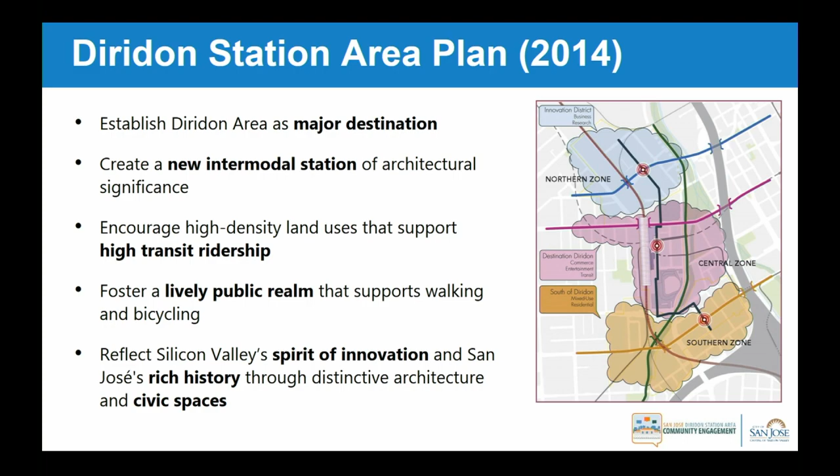We have the opportunity to really create a new neighborhood district. It's going to be a major destination area, a place that has a new intermodal station, building upon the existing transit services already provided there, in addition to the exciting new transit services that will be coming.

With that comes the opportunity for significant development — high-density land uses, a mix of uses, and a place for many people to live, work, and enjoy the area.

Along those lines, we know how important public spaces and the public realm are, making sure we have opportunities for placemaking and respites for people to enjoy — both passive and more active types of activities.

Lastly, this new neighborhood district really is an opportunity to reflect who we are here in San Jose — the rich culture that we have — and to include that spirit of innovation throughout the process.

So what does the Diridon Station Area Plan cover? It covers a lot, actually. I'll go through these elements quickly, but there's a big focus on land uses and where they're located.

There's a focus on urban design, and those public spaces — the gathering spaces — that are going to be so critical for the people living and working in the area, the station concept and how that's laid out, and obviously transportation and connectivity, and how the area is going to work.

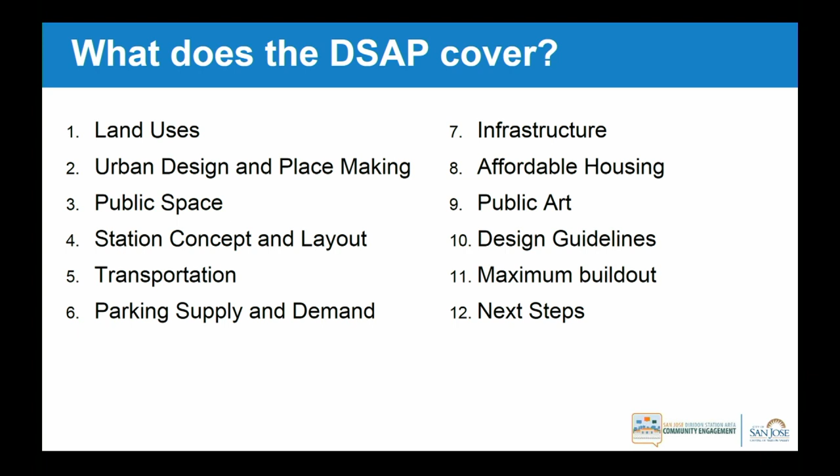Within the existing neighborhoods surrounding the area, we know that parking supply and demand is going to be a big item, along with other infrastructure needs. Affordable housing, we know, is very important.

Part of the placemaking includes public art and other opportunities for placemaking, ensuring that we have really good quality design guidelines by which development proposals will be measured, and then how we can maximize the development potential in the area.

So why the need to amend the DSAP? Well, there have been lots of changes since 2014, and we now have an implementation partner to help us implement that vision. For example, we're no longer planning for a ballpark, so that's a big change in the plan.

We now have the Diridon Integrated Station Concept Planning effort underway, and we want to incorporate that work. We also have the implementation partner, Google, who is pursuing a mixed-use development within the station area.

Just recently, the city completed the Downtown Airspace and Development Capacity Study, which council approved earlier this year, so we now have the opportunity for higher heights in downtown and in the Diridon area.

Council also approved last year Climate Smart San Jose, a very ambitious planned strategy to be more environmentally friendly and sustainable throughout the city.

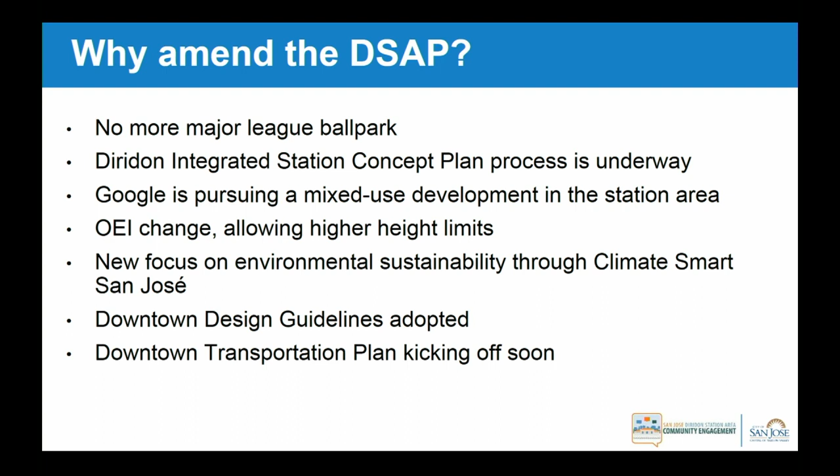Just very recently, the City Council adopted a set of new design guidelines for downtown, including the Diridon Station area. And lastly, we're about to embark on a very important transportation plan for downtown.

So what we expect to actually change in the station area plan — first and foremost, an opportunity for more development capacity to reflect the increase in heights.

We'll be looking at land use designation changes. For example, I mentioned earlier the ballpark that's no longer being planned for, so with that land use, we'll look for that particular area, as well as other opportunities for land use designations to make sure we have a good mix of office development, housing opportunity, and perhaps other uses as well.

We're going to be revising some of the concepts around connectivity, infrastructure, transportation, and public spaces. For example, we know how important the gathering spaces are in the station area, so we're looking at where those should best be located. We want to refer to some recently approved documents, including the Downtown Design Guidelines, the DISC effort, the soon-to-be kicked-off transportation plan for downtown, and other studies and plans that are going to be underway.

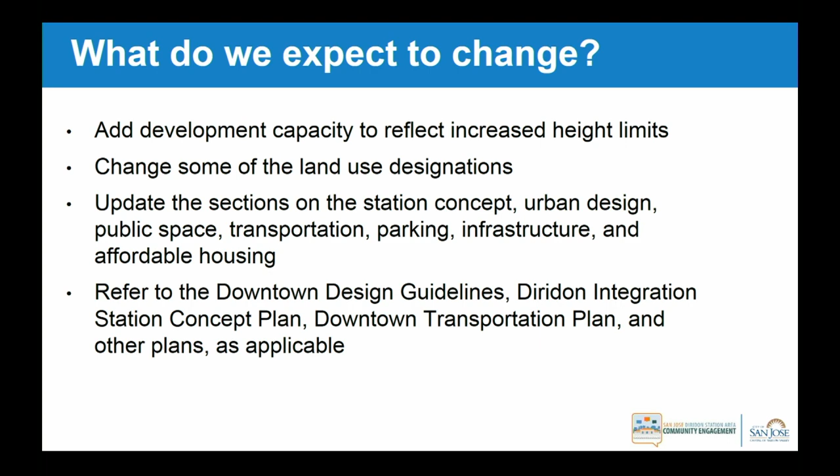In conjunction with the Diridon Station area plan process, we will be working on lots of other things, and all of this will be happening concurrently. We received City Council direction to prepare a series of implementation plans for the Diridon area, including a district parking plan, infrastructure financing plan, and an affordable housing plan. That work will be underway.

The city will be processing and reviewing Google's mixed-use plan along with the development agreement, which would include the community benefits plan. We also anticipate other property owners will be submitting their development applications to the city, and we'll be processing those as well.

So when we look at the actions the City Council will be taking, from the city side, the city will be initiating amendments to the Diridon area. We know Google will have ideas for their mixed use project and will likely be submitting amendments to the Diridon area as well. The city will look at the Diridon area from a very comprehensive approach, making sure we have an appropriate amendment for the non-Google owned lands. We anticipate this will also include general plan amendments, as well as the three implementation plans I referenced earlier.

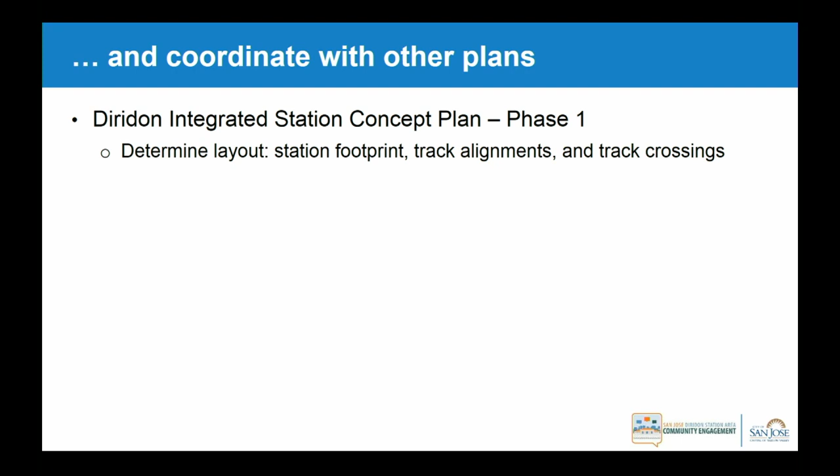So the process will build upon the past, and it will also coordinate with other plans. The next agenda item after you hear from Google will be on the concept plan, and you've already heard updates on this a couple times, so this is not new news, but just to remind you that right now we're in phase 1 of the concept plan, and the outcome of that will be determining a layout for the station, track alignments, and track crossings.

We'll continue work on that layout, refining and optimizing it into phase 2. Also in phase 2 of the concept plan, the team will be working on a program delivery framework—the organizational component of that.

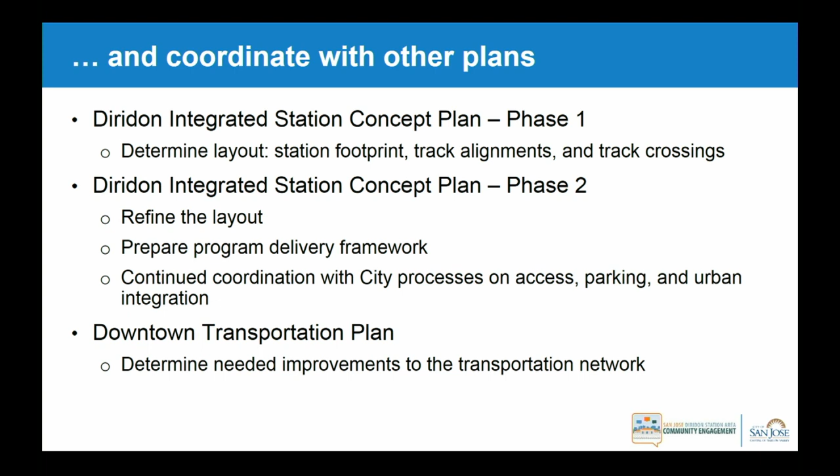Throughout this time, the concept plan team will continue to coordinate with the city processes related to the Diridon Station area. Of course we have the Diridon Station Area Plan and the amendments and the Google development that's part of that. There's also the downtown transportation plan, so you can see there's a lot of overlap in terms of topics: access, parking, urban integration, things like public spaces. These processes will all be happening over the next couple years, concurrently, really having to talk to each other and coordinate to be consistent.

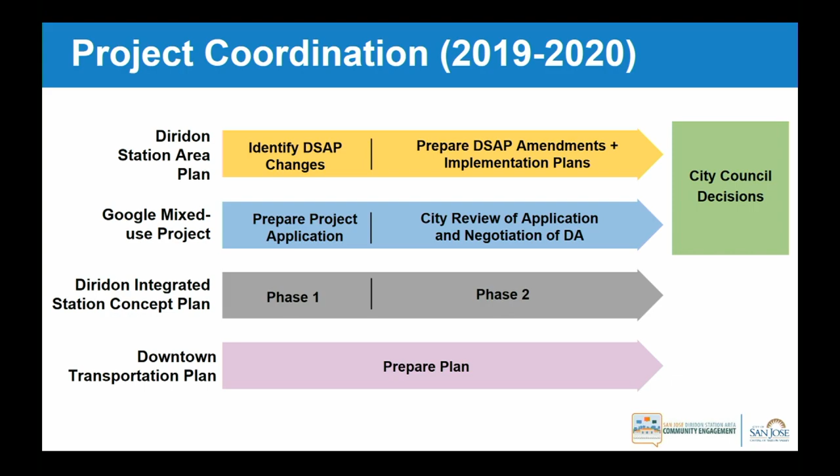This diagram shows how the DSAP, the Diridon Station Area Plan, and the Google project—those were the timelines you saw earlier—and layered on here is the concept plan and downtown transportation plan. We're in phase 1 now of the concept plan while we're ramping up for these efforts, and later this year these things will begin. It seems like a lot is going on, and it is, but it's actually aligning very well to have these planning processes happen concurrently and start to really gel and coalesce around the same concepts.

So with that, I will turn it over to Google. We have Joe Van Belleghem, Alexa Arena, and Rebecca Prozan.

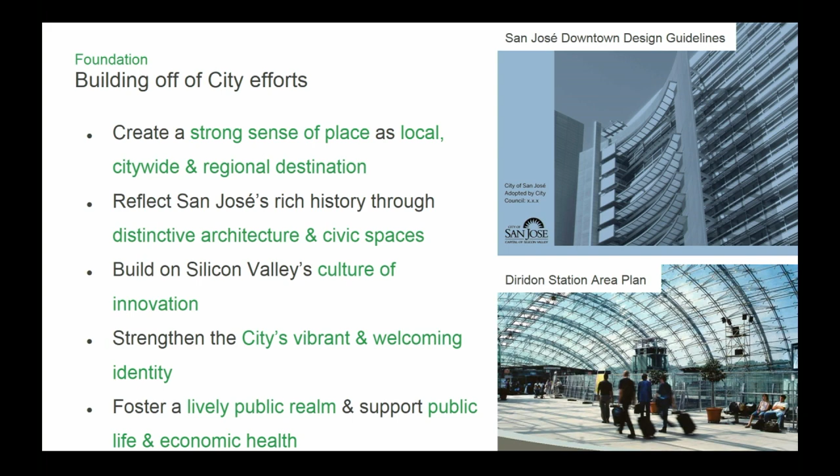So we've rooted ourselves very much in that MOU and very much in the planning documents that have taken place before us, which obviously the downtown design guidelines represent a recent version of, as do the Diridon Station Area Plan, the SAG report, and all of them are hitting on a really strong desire to create a great public realm and a great sense of a culture and vibrant life where this becomes a place where everyone wants to go to and can experience.

Likewise, it's very much rooted in the context of so many different elements.

When you're working at this scale and thinking about how to create the right type of mixed-use plan, there's everything from the technicality of site and site constraints, of place and context and the nature of the environment you're around, of community, both the positive sides and some of the areas we need to pay strong attention to, like areas of homelessness around the site, where I think we can have strong leadership on how the project can help get ahead of and lean into that, and also of the policy around us, of how the city is advancing in so many different ways, and how can we reflect that within the place, as well as creating an economically viable project.

So really, it's exciting to us to think about how all those pieces can orchestrate and come together in a complex way. It takes a bit of time, and that was partly the time we've been spending to really get geared up on a lot of that input.

And ultimately it has to be underpinned by, you've heard us say, social infrastructure a couple of times, which is really trying to say it's more than about buildings. When you go to a place, you don't experience the buildings, you experience the interactions with people and social life around you, and the fundamentals of what builds that community up.

And so those are things like libraries and schools and great open spaces and great opportunities to be part of the development and what it's in the city at large. So we're going to spend a lot of time on that, and I think that becomes a rooting to how we think about the plan beyond just the physical.

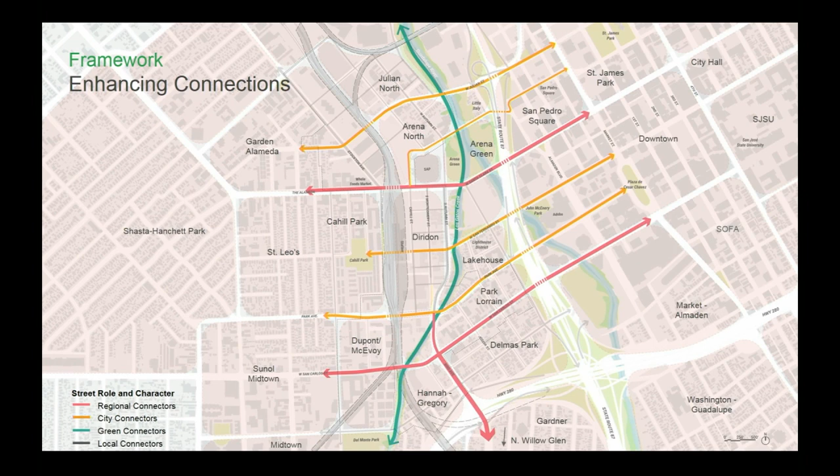And first and foremost, this is a diagram you saw a couple of SAG meetings ago, and it's about enhancing real connections. That's the really special part of this site, that it is at the nexus of incredible transit, incredible natural infrastructure, and a really diverse and vibrant set of communities around us. So there's so much opportunity here to connect in and to grow from our context.

And the key principle to that, the strongest adjacencies that are direct within the site, are the rail station and how that matures, which obviously we're very active in with the DISC process, sorting out how that can work in the future and how it can work in its present state.

The SAP Center, which has brought an enormous amount of activity and liveliness to the area, which we want to make sure the plan supports and responds to. And what is a pretty incredible social infrastructure piece in and of itself, the nature and the creek and the river and how that comes together.

Obviously, San Jose has thought so much about this resource and what it means to the city overall, and we really want to slide into that and fit this piece of infrastructure in a way that really can bring it alive and connect it to the broader city at large.

And then we really are approaching this with a set of strong principles of how do we think about this, not just as a regional destination, but as something that's very rooted in localism. How do we make sure small businesses, existing businesses, are part of this development and its growth?

How can we amplify the best of what San Jose is all about and create a really vibrant, social, welcoming environment through our streets, through our programming, through what we're supporting through our social infrastructure? And how can that become the basis? So this is really of design.

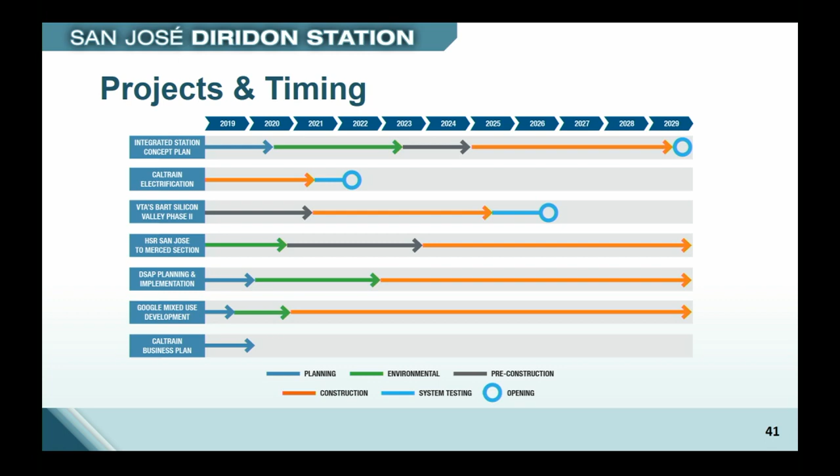We acknowledge there's a lot to coordinate on, and I think we're getting better and better at doing that. In a couple of our last rounds of outreach, we heard a lot about how does this all work together in space and over what arc of time. So we know there's a lot going on in this area over some period of time — it could be the next 10 years, it could be beyond that.

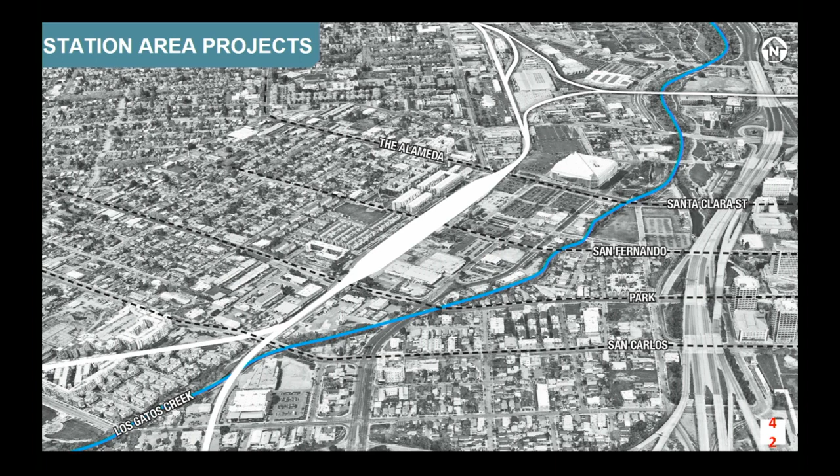What we've tried to represent is some spatial thinking about how you could sequence in projects. This is really conceptual — just to get us thinking about lots happening in the space at the same time, potentially for quite a long time. Caltrain electrification is already under construction and will be done in a couple of years.

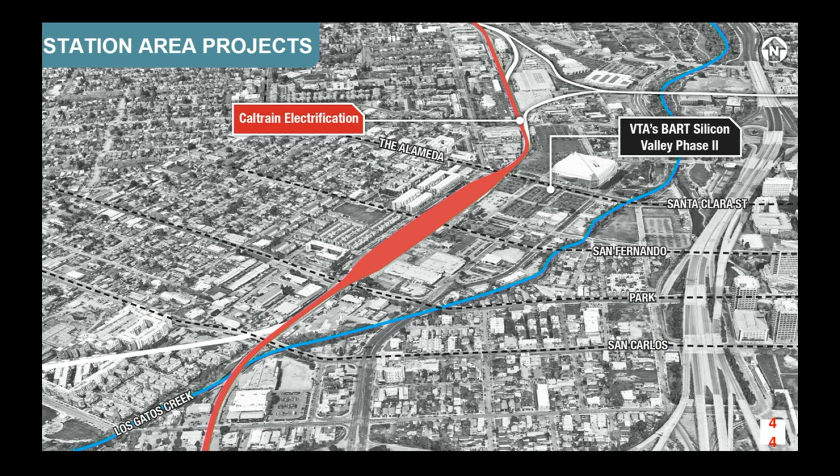We have the BART project that is well underway, environmentally cleared and going into construction in the next couple of years. We know there is station area plan implementation in the Google project in this relative vicinity — this is the DSAP outline. And then we have high-speed rail at some point coming into Northern California and stopping in San Jose.

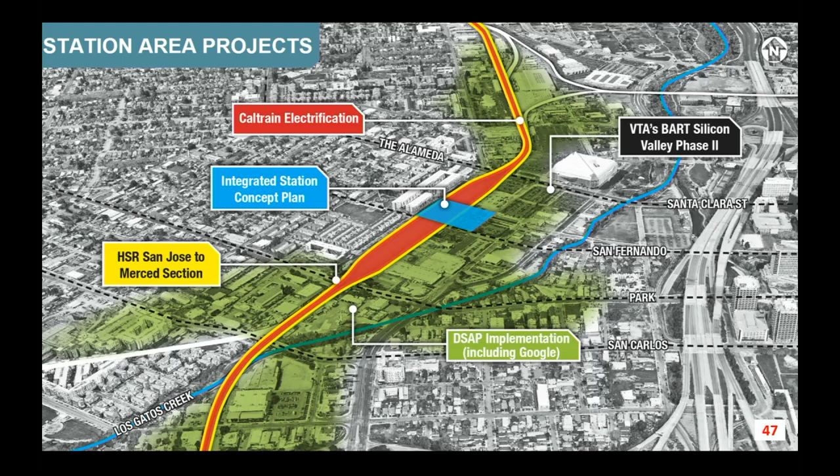And then the integrated concept plan. Again, this is just to help us think through our conceptual design process — how would you start to sequence in projects over some time frame. We're figuring that out, and we will work all together to make sure it gets done the right way.

So our phase 1 process and outreach rounds: we started in the fall with objectives and ambitions by the partner agencies. We were here a couple of months ago and showed you those key elements — the track configurations in terms of vertical organization, as well as the station horizontal layouts.

Tonight we're going to show you some potential layouts for this intermodal hub, and we'll talk a little bit about that. Where we're headed is eventually getting to a draft spatial vision that the partner agencies can weigh in on, hopefully telling us to keep going and keep developing this program.

We've also done quite a bit of community outreach and have been taking that input and putting it back into the design process. What we find really encouraging is that the themes coming out of the outreach are very consistent with what the partner agencies are thinking about in terms of passenger experience, identity, access, connectivity, development. It's wonderful to see our community partners in such good alignment with our public agency partners. The concept plan process was designed in a more iterative sort of planning.

It's very planning focused. Sometimes we jump right into environmental clearance before we've done a little bit of planning. So we intentionally decided to start with requirements and understanding each other, the four partners, what they require, and what their ambitions are. What do we hope to get out of this?

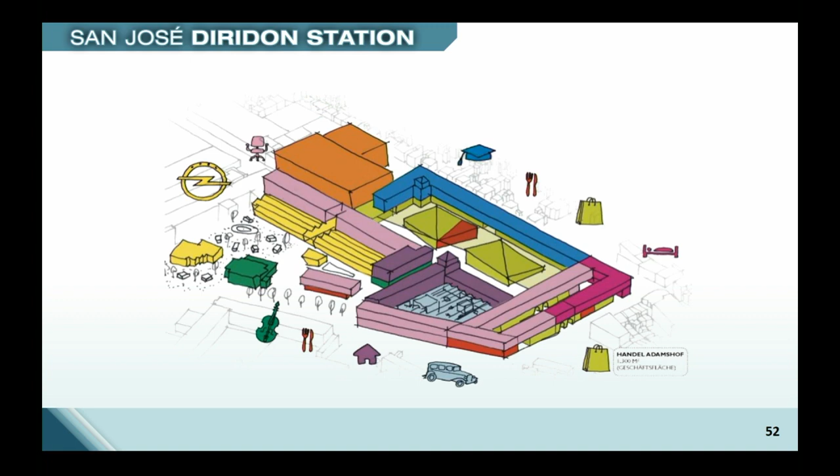The graphic you see is the spatial Lego building block item that we hope to come out of phase 1 with. So tonight we're going to talk about what we're calling the big moves and the kit of parts. We've shown this a couple times, but these are the Legos, or building blocks, that make an intermodal hub. This illustrative graphic is from a project in the Netherlands, and it represents that you need a bunch of ingredients to have a successful intermodal station.

What we started with, which we showed in February, was the vertical platform position - the platforms being at grade, kind of where they are today, or maybe a little elevated - and station locations between San Fernando and Santa Clara Street, with something possibly on Stover Street, which is in the middle. Those different station locations affect the actual heavy rail corridor.

So there are considerations around what we call the northern alignment, which goes north towards the Caltrain maintenance facility and connects into the Peninsula corridor, and the southern alignment as it travels south towards Tamien and Gilroy. We have a couple ideas on how that southern alignment might be configured.

The items we're going to show you tonight aren't meant for you to just pick one that you like. We want to talk about the priorities of the components in the kit of parts and what works really well. These represent a spectrum of things, and the intent is to mix and match and optimize to come up with the right layout and spatial organization for Diridon.

The kit of parts includes everything you need for a great intermodal station: pedestrians and bikes and how you get to and through the station, where the light rail goes relative to the heavy rail tracks and the station entrance hall, the center of gravity, how VTA buses access the station off the main arterials. It's really important we have a great BART connection for our new BART station. We also have lots of intercity buses, taxis, TNCs, shuttles, scooters - you name it - at Diridon, and we want to make sure there's space for those technologies, and emerging technologies we haven't even thought of yet.

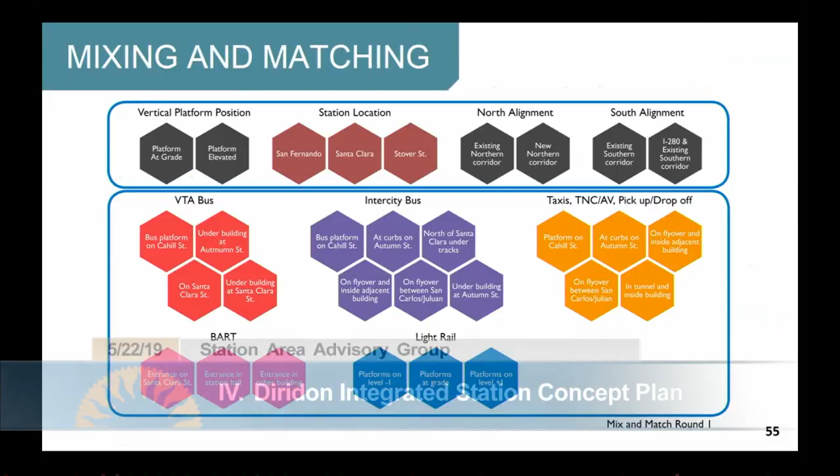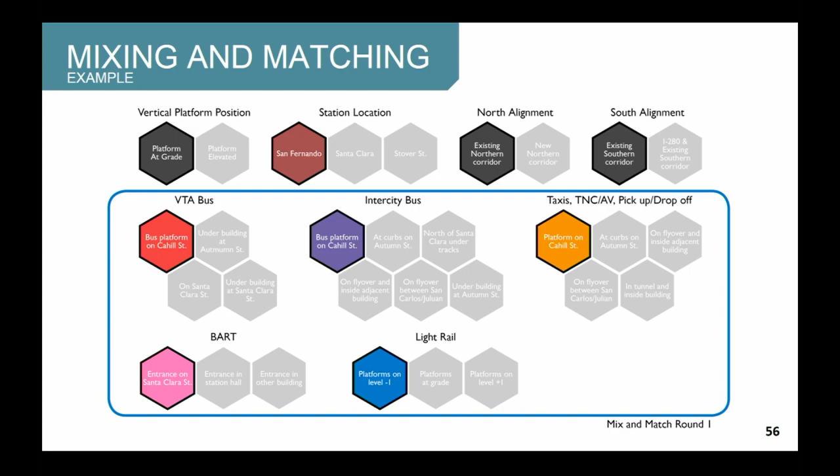As it relates to the concept plan process, in terms of mixing and matching, what you see here in what we call the honeycomb graphic, the top of this honeycomb are the big moves: vertical platforms, station location, north alignment, south alignment. If you pick discrete choices within that, you get different outcomes for the station. All the colorful parts of the honeycomb are the other modes, the kit of parts. When you stick these together, you start to put together a layout for the intermodal station. If you mix and match those, you get slightly different outcomes depending on where the buses might go. You might have a different transfer connection to your taxi, your TNC, or your light rail. So we're going to talk through what happens when you mix and match these components—there are different benefits and trade-offs for the intermodal station.

So with that, I'm going to turn it over to Martin. He's going to walk you through our layouts.

Thank you, Liz. As a reminder of the layouts we're showing, it should give us a better understanding of how that would work for operations like heavy rail, light rail, bus, and also how it influenced the urban fabric.

I'm starting with layout 1, which we are calling San Fernando Street. With every layout, I'll show you the current situation with a zoomed out version like this, which is the rail corridor, and I'll zoom in a little more on the intermodal hub. So with every layout, I'll do two aspects: a zoomed out one with the heavy rail corridor and a more zoomed in view around the intermodal hub.

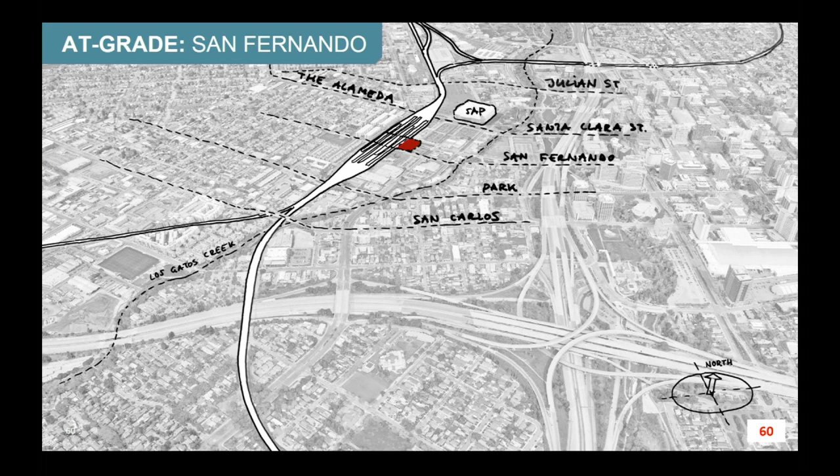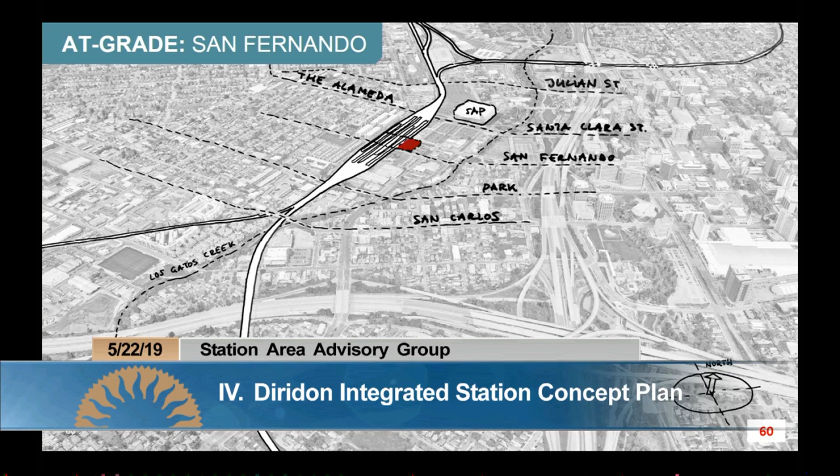Here you can see the station area today. We've included street names, the SAP building, and the rail corridor for your reference. When we talk about San Fernando Street, it's an at-grade station. There are some changes we discussed last time around the train station, which should facilitate future operations. Not much difference to the north and south alignment, but some definite changes to the intermodal hub itself.

This is what that would be like if you do mixing and matching of the elements we're choosing. Now let me zoom in a little bit more on the intermodal hub itself. This is how the station area is today, and you can see in the different colors all the different modes or elements which should all be combined in this way.

I think it's important to know, as this is the configuration more zoomed in, that all layouts assume a through-running station. This means that currently we have trains laying over at Diridon Station—that will not happen anymore. They will be out of the train station and moving either north or south away from the train station itself.

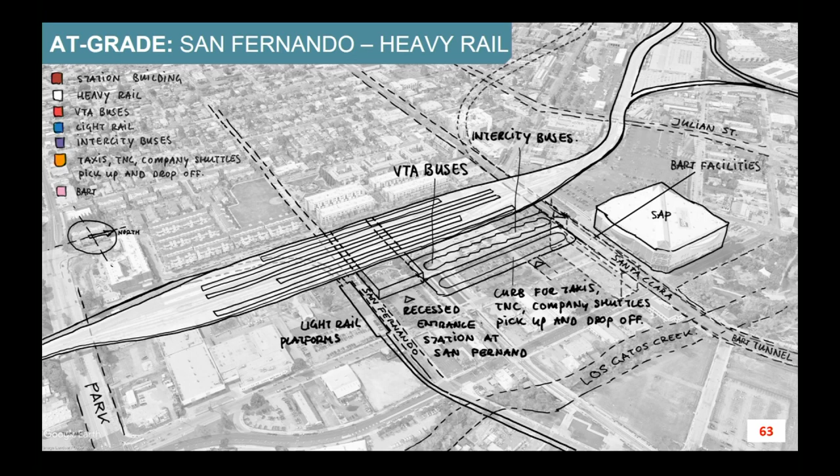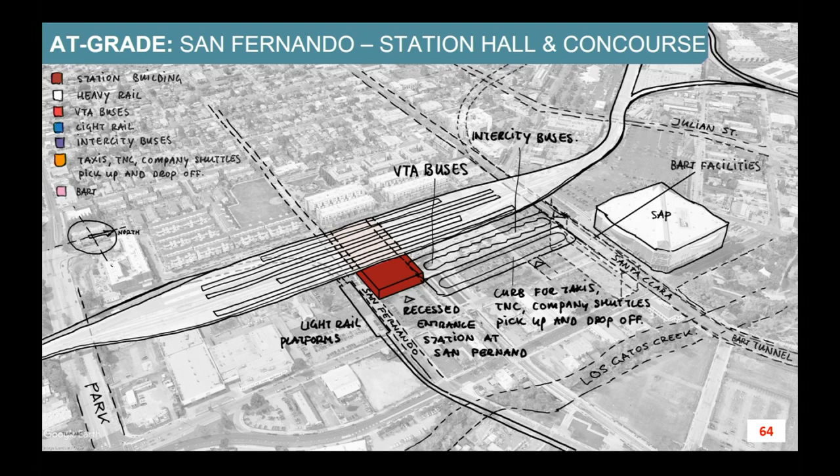And here you see the layout at grade for the station. Now let me take you through one element to start with. You can see here a station building, with a note showing where the entrance will be recessed, and we have a concourse underneath the tracks because the tracks are at grade, and you need access to the station from an underground facility.

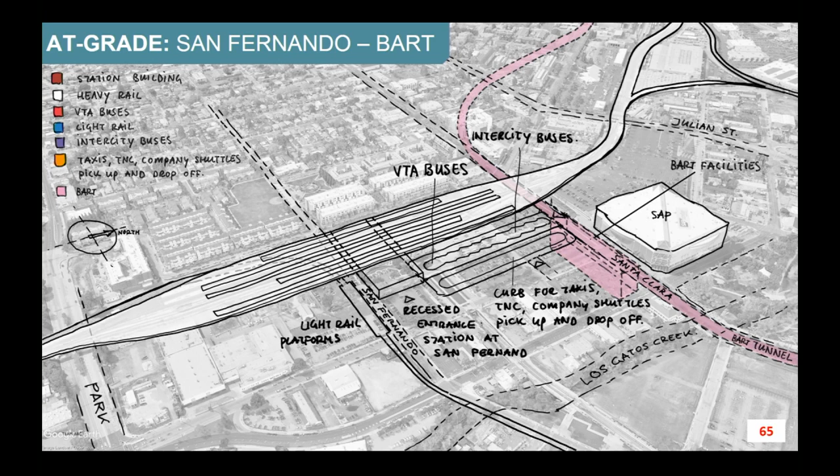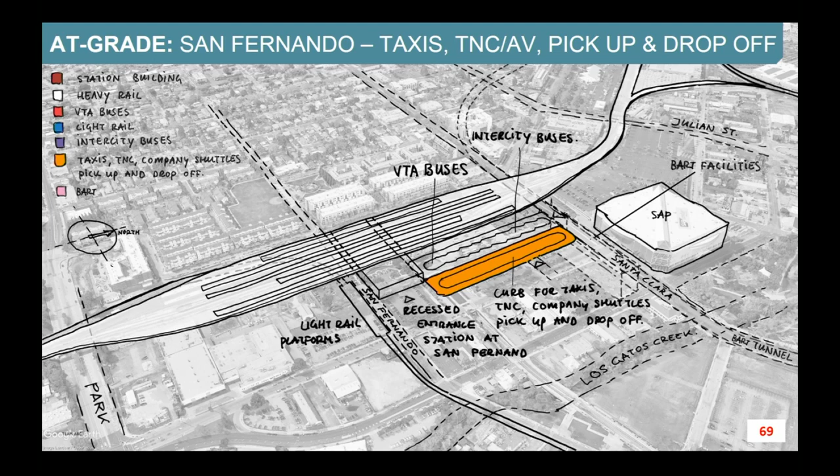We have obviously a BART layout, and with all layouts, they will assume the current corridor as VTA is planning the rollout of phase 2. There need to be spaces for VTA buses, intercity buses, and light rail as well, which you can see here. Last but definitely not least, the taxis, TNCs, and pickup and drop-offs. As you might see, this is how it would all work together.

This does not necessarily preclude any development—this is how the elements would look like together in one layout. Because the train station here and the tracks are at grade, we need to create new underpasses, a little wider than it currently is, around San Fernando. What we think of this is that the railroad acts more as a barrier—you have to use an underpass or an overpass to cross the tracks.

The other interesting thing about this layout is that the train station access from the heavy rail to BART is relatively far away, around 2 blocks. This layout might not necessarily meet all our ambitions for creating the next intermodal hub at Diridon. So that leads me to another layout, layout number 2. It's called Santa Clara Street.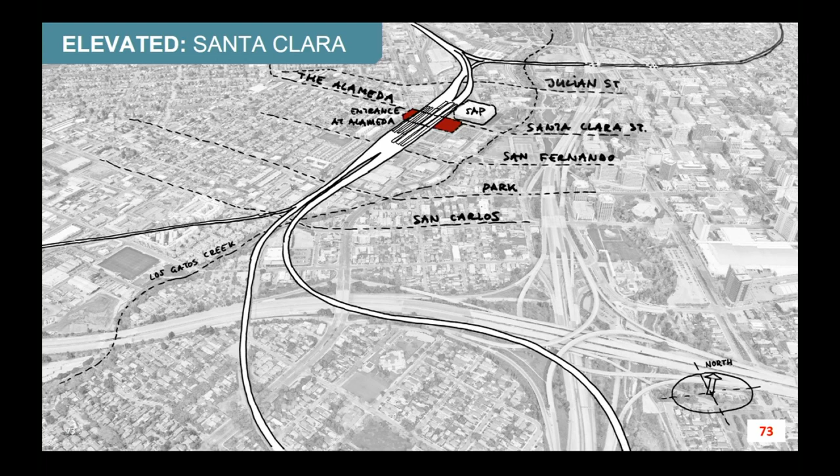Since we have 2 rail corridors coming south and 1 rail corridor going north to the peninsula, I'll zoom in more into the intermodal hub. We need to somehow connect these, shown up north on the top right of the image - a so-called flyover to get back onto the tracks to the north corridor, because we also need to connect the freight operations to the Warm Springs sub going under Highway 87.

That is it for the heavy rail components.

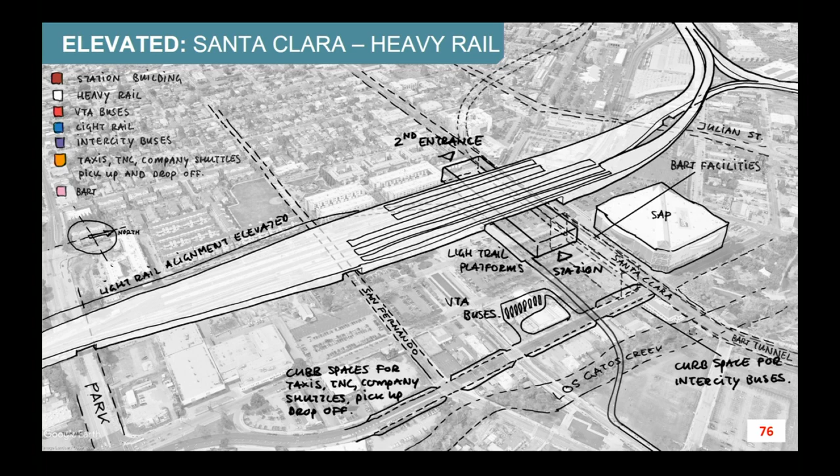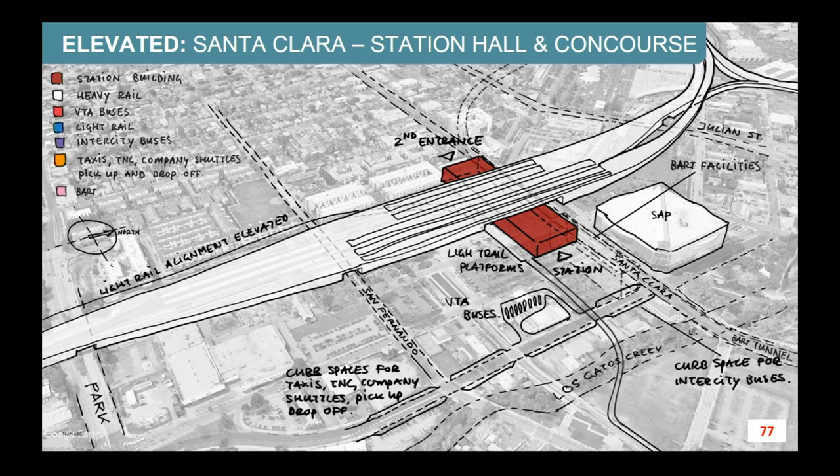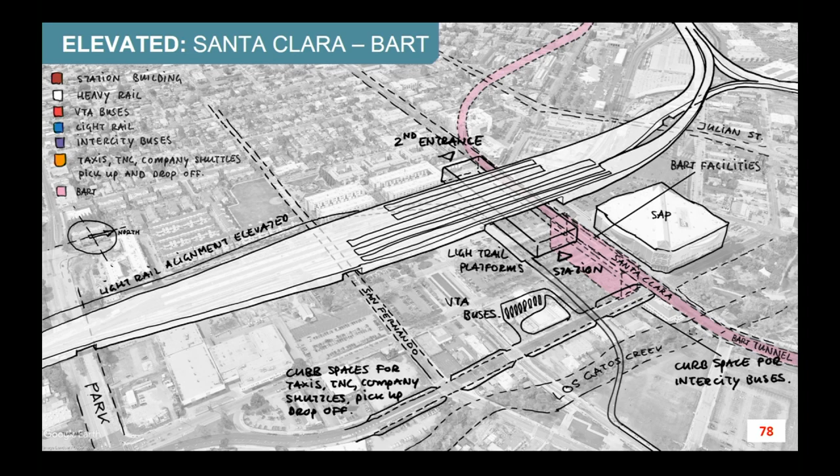Now let me zoom in more on the intermodal hub itself. Here you can see the train station, and also why we call it Santa Clara Street. It's elevated, as a reminder, and we think this station creates access to the west and east of the train station. It is very close to the BART entrance - you could even consider something like a direct connection from BART to the train station itself.

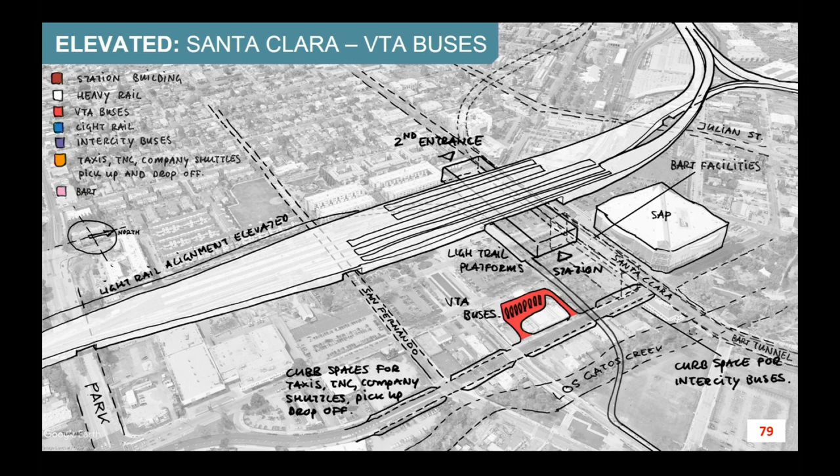The VTA buses are located around Autumn Street. Most of the buses come from the south, but there are also a lot of buses using an east-west connection along Santa Clara Street, which will have to use this facility to turn off to Santa Clara Street with a quick stop and go back onto their existing route.

Light rail is located at the station at grade, very close to the concourse. This makes for an easy transfer between light rail users and train station users if needed. On the left of the image, light rail comes up along the elevated structure, crosses San Fernando, then goes down to grade to connect to the train station. It continues further along its current alignment down into downtown.

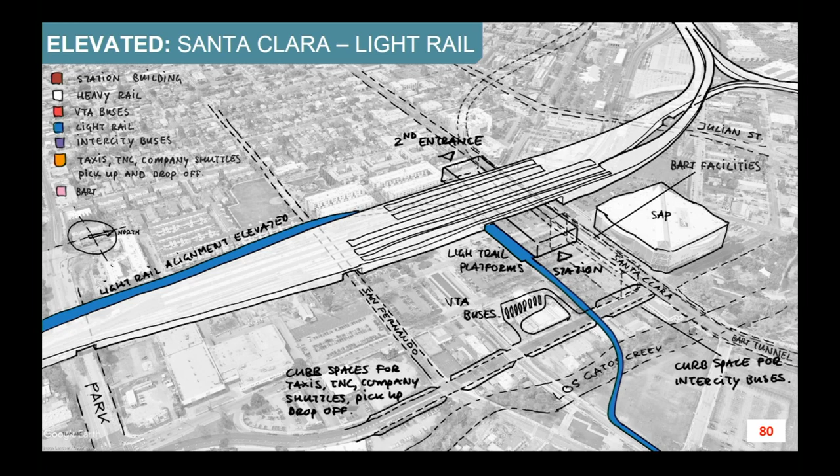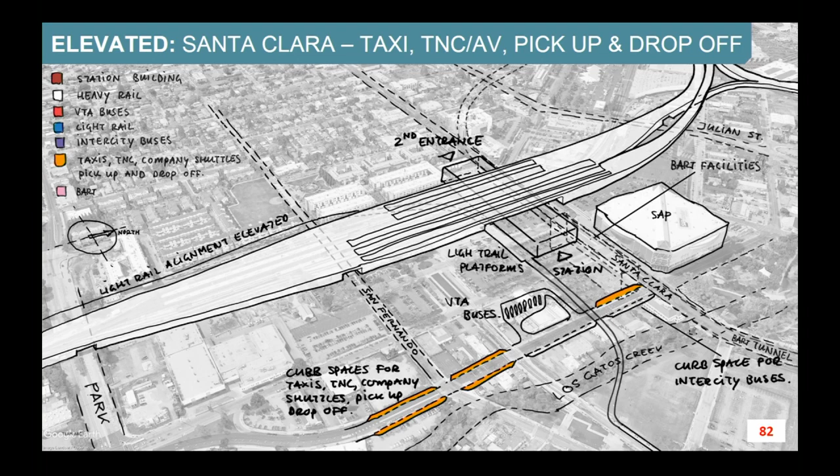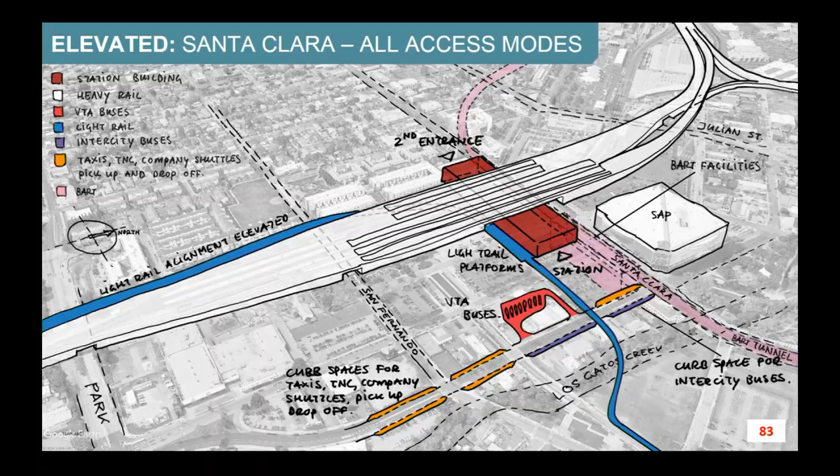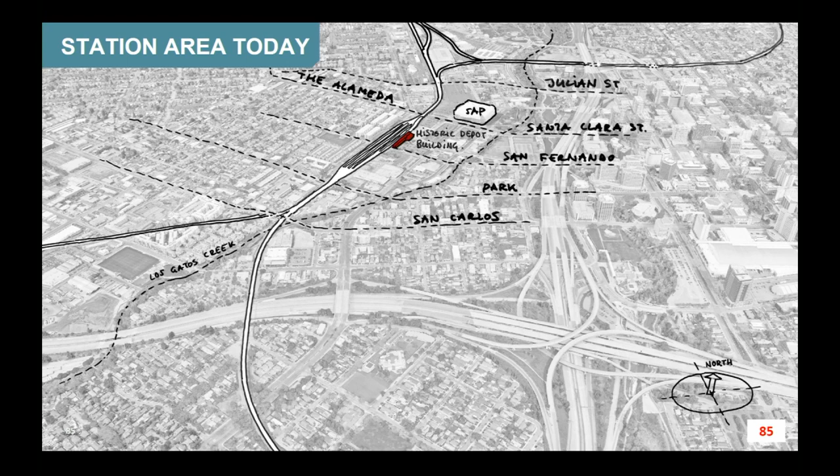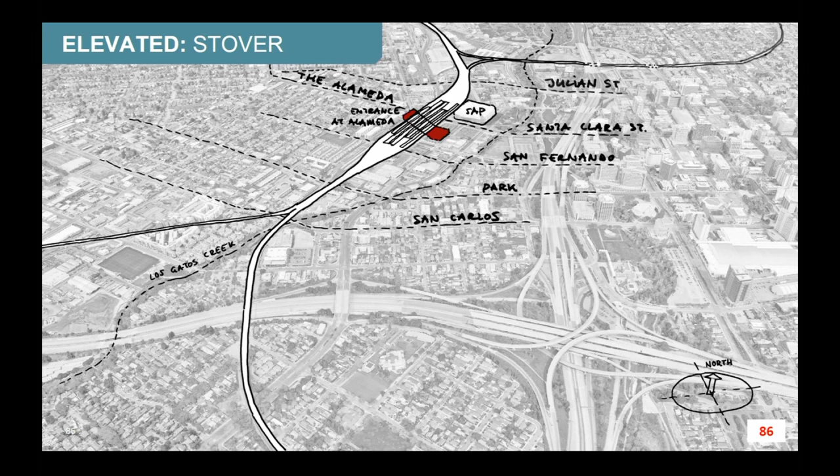I'll zoom into it a little more, because that helps. Here is the current station area as it is today. Because we're shifting the platforms north - we'd like to have a concourse around 1/3 to 2/3 of the platforms for good loading of the trains, equal loading and distribution - we are moving the platforms a bit more north. That does require a new alignment up north. This also means, for both this layout and layout number 2, that CEMOF needs to be moved south of the train station because of this new train alignment up north.

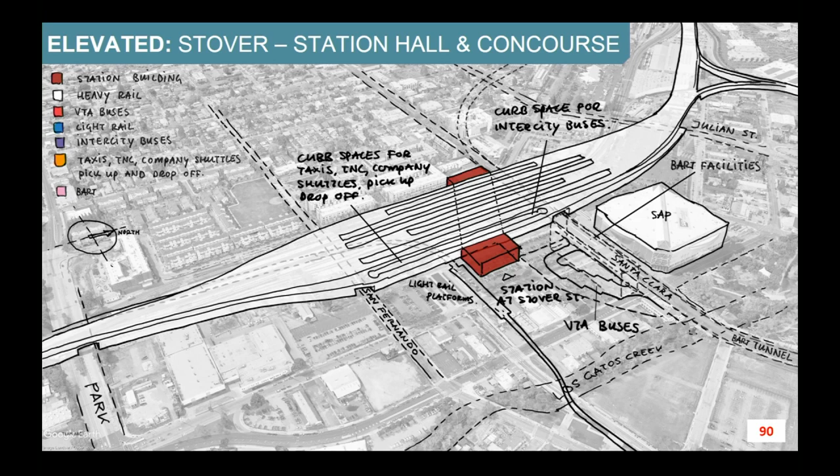The concourse itself is diagonal, or oblique as we sometimes call it, through the station, connecting Alameda on the west and around Stover Street to the east of the train station. Something we appreciate about this layout is that if you stand in front of the train station around Stover Street, you have a direct, clear line of sight on Santa Clara into downtown - an easy, natural wayfinding for getting into downtown as you exit the train station, or vice versa.

BART is again located on Santa Clara. VTA buses here are bus bays right at the front door of the station concourse, and they would be just off of Santa Clara. And even also with this one, as I've said with the previous one as well, here could be also development on top. But this is how functionally it would work.

In its current alignment, are you opening San Fernando Street on these last two? San Fernando is closed off now. Thank you for that question, actually.

What you can see here is elevated tracks, and because it's a sketch, it looks like a complete embankment of tracks. That is not necessarily the case. That is something we are working on, or what actually would be happening under the tracks. These sketches are meant to give us an idea of what the configuration would look like and how it would interact with the urban fabric.

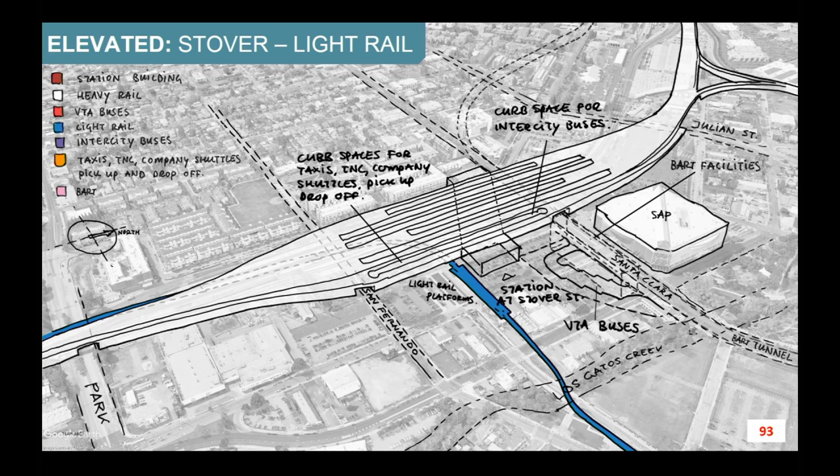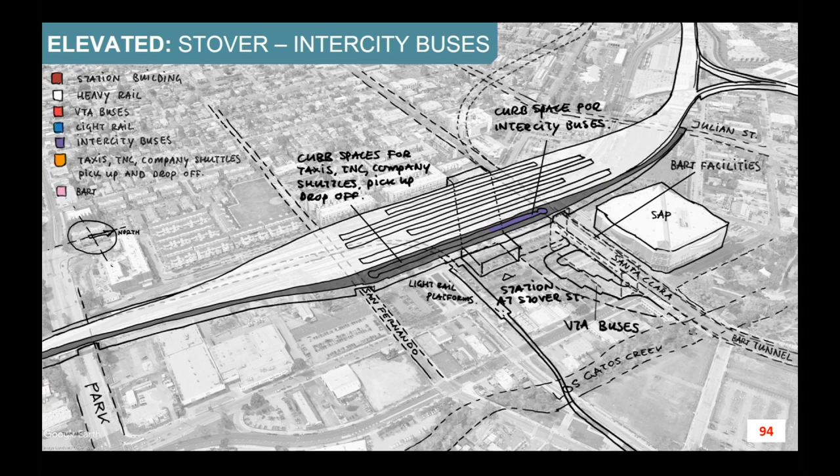What you see here is a different element altogether. This is an element where we would add on to the tracks another elevated piece of structure where taxis, pick-up and drop-offs and intercities could stop, drop off their passengers, and they would be going into the concourse to go into other modes. The entrance and exit of this facility and vice versa would be through Julian Street or San Carlos, and it would be a direct connection to all the other modes.

And here you see them, and here you see everything connected together. So that was a whirlwind of information for me in a very short amount of time, also to make sure that we have enough time for your questions. There was one more thing I want to discuss with you before we started our presentation, with mixing and matching.

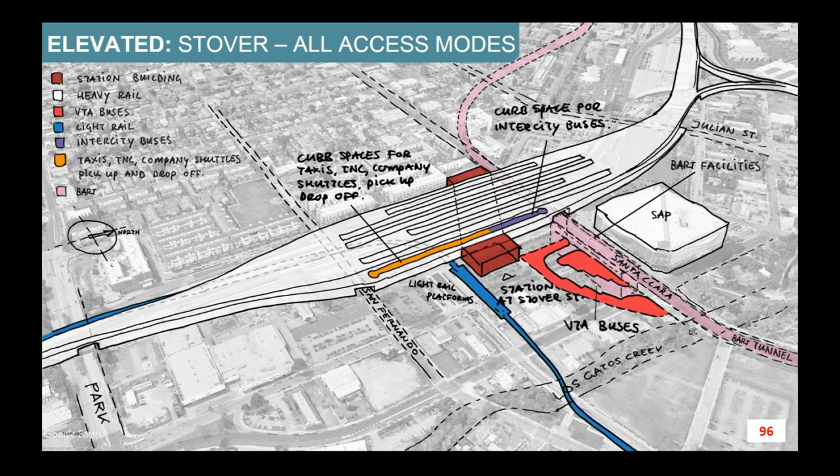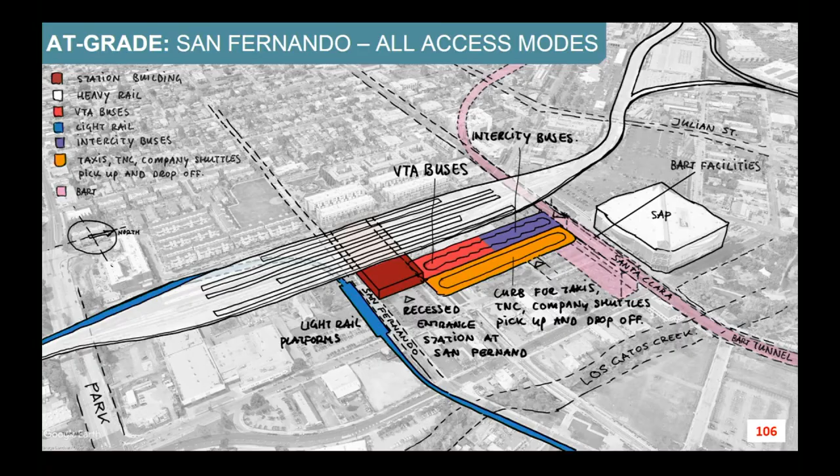So with that in mind, just a couple of quick things. This is not the one opportunity where the public, you all, as well as the public, can provide comments and questions on this. As Liz said, there's a public workshop on June 10th and another one on June 15th. The city is also offering stakeholder presentations, so staff can go out, Lori can go out to your neighborhood association, to your organization, and talk about these different layouts, Lori and team.

So, I think there's a lot here. So what I want to try and do here is first to take questions, not answer the questions individually, but just take questions of clarification, just because there is so much information here. And then Martin and Liz will try going through and answering those questions collectively. And then we can come back and talk about some pros and cons of different options and maybe additional information that you all think would be helpful to understand the complexity of what's going on here.

Okay, a little bit different format. So just going to start. Again, I'm going to go around the room and we'll just see if people have questions. Yeah, so again, this is questions, answers later. Yeah, let's go around because there might be multiple questions related to this.

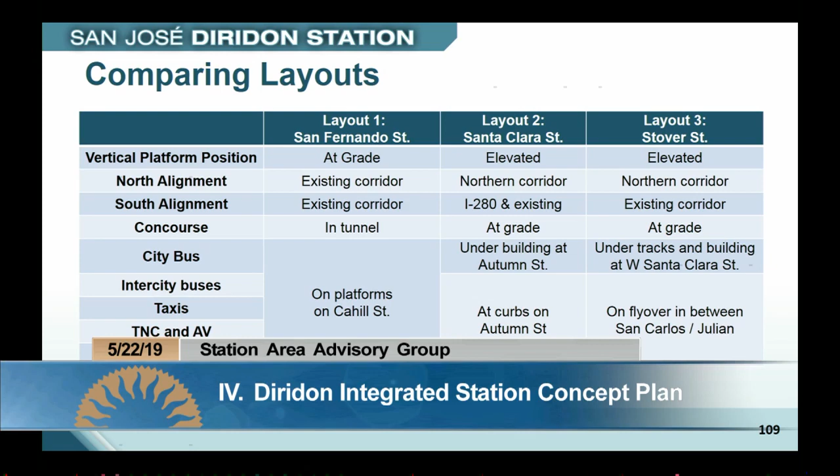Bill, why don't you go first? One of the things that comes up often is parking, and even Mayor Liccardo was saying we want to design around people, not cars.

Is there any strategy to just move parking outside of the core, perhaps supporting even SAP Center in a way that you could use some of your transit to take care of that? Yeah, I think that's a good question.

I think we're going to follow the lead of the city relative to the DSAP as well as the district parking study that they're going to do. I think we need to follow that process so that we're appropriately looking at it. Right now we'll have some ability to look at where we could put parking, but we recognize there's a larger policy effort happening with the city, so we'll follow their lead on exploring what makes sense relative to that kind of question.

Jim? Want to go next?

The area plan is to ensure the continued vitality of the San Jose Arena. We're concerned that the options 2 and 3 shown tonight would do just the opposite. They would jeopardize the future of the San Jose Arena and all of its events. So we're very concerned about the impacts of those schemes as shown tonight. Now we realize it's an evolving process, they may change or be refined, but from what we've seen, we'd be very concerned about that.